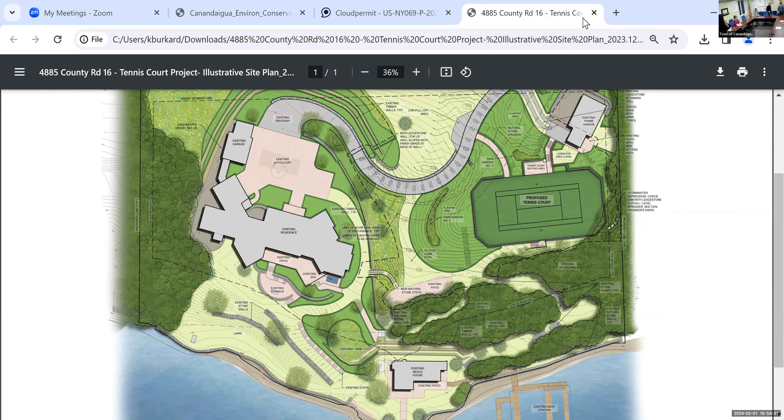That was really nice looking. Let's see, have another guest here. We should make those renderings our standard from now on. The site plans were harder to look at.

This is our 5 and 20. Are you for the 5 and 20 as well? It's going to be okay. I was just trying to figure out who was here. So we'll skip around and do the ones that people are here for first.

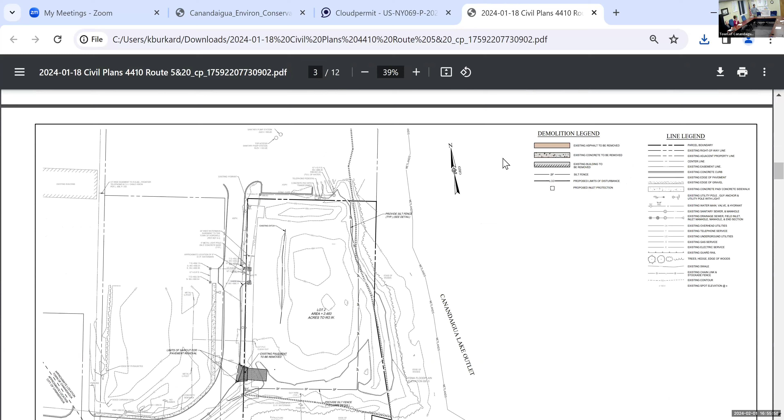So it's essentially a pre-approved pad site on 5 and 20. It was part of this whole overall development with the hotel. I believe it was approved, I have the approval drawings from '07, '08. And essentially we've kept the same design. It kind of fits in there with the outlet and the setbacks off of 5 and 20. The building is 100 square feet smaller than what was approved. It's going to be a 2-tenant medical use.

The parking, let me go back. The original SWPPP was developed for the whole 3 parcels with the retention pond in the rear. We looked up that stormwater permit. It actually, the hotel closed the permit in 2020. But we would submit a new SWPPP. We have prepared one. So what's happening is everything is draining to the bioretention rain garden areas. There's no curb, so it just sheet flows into there. And then there is a discharge here and it will continue to the stormwater management facility.

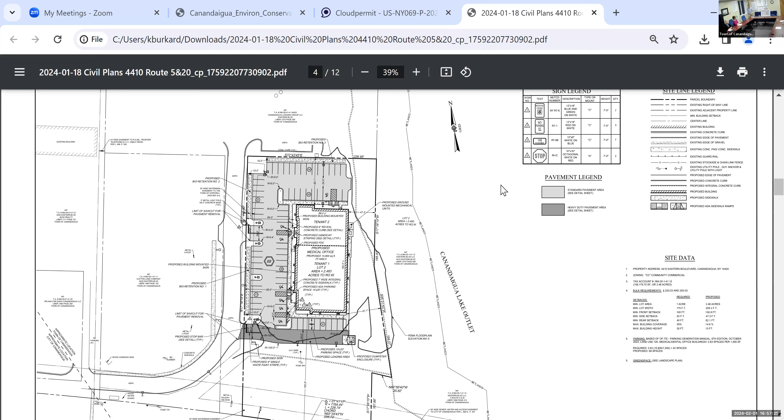Landscape, we're adding landscape. Most of the material we've provided is native. We put the dumpster enclosure kind of in the front. It's going to be screened. I think we're about 754 feet off of 5 and 20 with some vegetation in between, so I don't think there will be an issue with it. There were some renderings from the architect, it's more of a modern style.

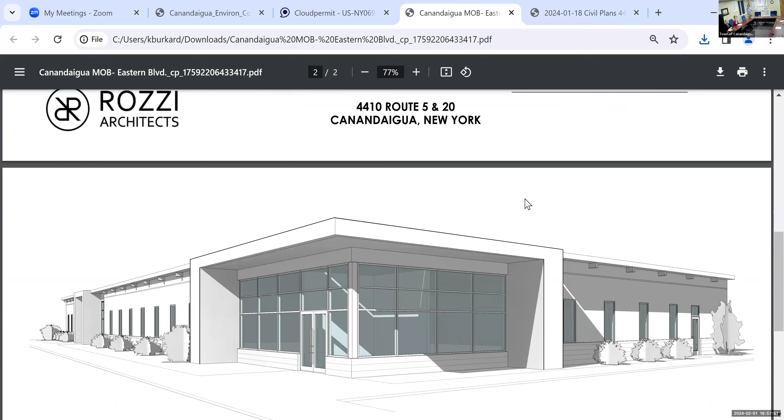Do you have something you wanted me to open? Let's see. Exterior perspective drawings, yeah, we do the perspective drawings. That gives you the look. Yeah, that's very nice. If you go back, it gives you the kind of color palette, which was more neutral, earth tone colors.

There are some state wetlands. We had them delineated, earth dimensions delineated them. Up in the front, there's essentially a drainage ditch through here, and then off of the outlet. That has not changed per the previous determination. So we have the 100-foot buffer both ways and we are out of that area. So no changes in the wetland delineation when we went back out there. There was a little more increase on this one, but this one remained the same.

Okay, so outside, within the drawings, we have all the wetland 100-foot buffers. I didn't get a chance to check, but any earthwork or whatever, that'll be not anywhere in that area would occur, will not touch, will not disturb the buffer. There's a floodplain.

Floodplain comes up in a weird shape. We are impacting the floodplain by about 50 cubic yards, and we have offset that in this area with a cut of about 66 as part of our cut-fill analysis on the floodplain. So we provided that mitigation.

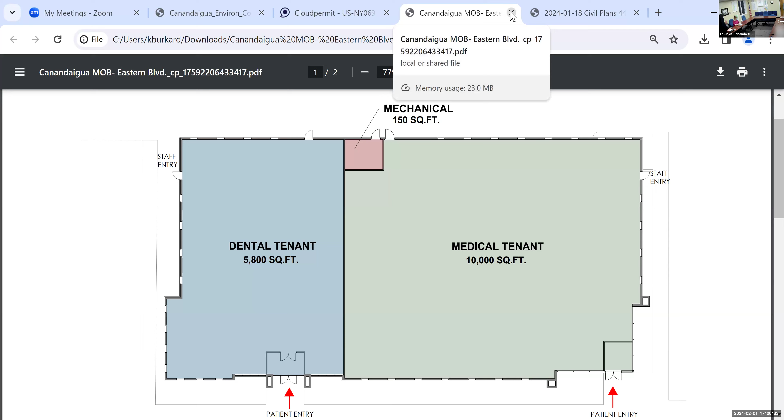And we're all here, isn't that awesome? It is.

We had passed on this one, just so you know. This one's going for an extension, and it's also going to the zoning board for a variance interpretation.

And we did this one, they had come in, it was the Wegmans tennis court, so we had done that one already. We're up to New Michigan. This was a subdivision. Mike, did you have any info on this one?

I think Kristen worked on that one, that's not Dave Emery, is it? No. It's right on the corner of New Michigan and County Road 30. Just two big lots.

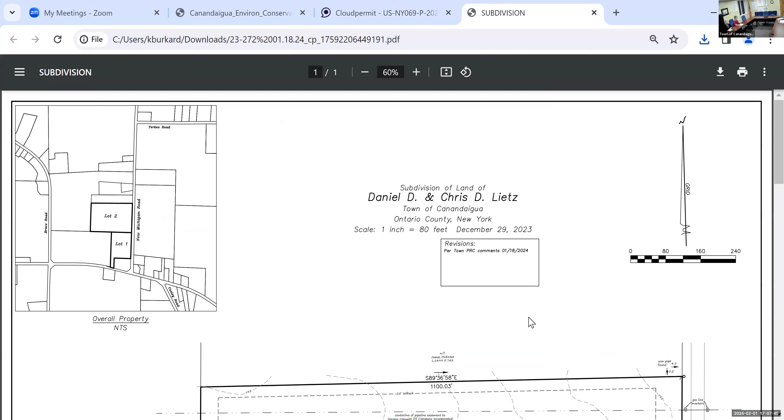Why are we seeing that? It was farmland, so I think it's getting— we just automatically see it when it's farmland? I believe so. Acre woodland right next to it too.

Edith's next to it, yes. Very familiar territory. They're just dividing it into 2 lots.

I will put on the ag committee hat and say it's a loss of farmland. Well, it is a loss of farmland. If you're interested in 3 square meals a day, you hate to see too much farmland go, but yeah, there you go.

This one is just north of the new one that we saw before. No, not the strategic farmland, but the new agricultural overlay PDA. That one, its northern bound is County Road 30, so this is north of that.

I think if it's just like a house—because we know from the one that was on the other side of Edith, that the aquifer is not very wonderful. It's pretty shallow, it doesn't recharge very quickly, and I don't believe they have public water at all. No, there is no public water from Yerkes north to County Road 30 to North Bloomfield Road.

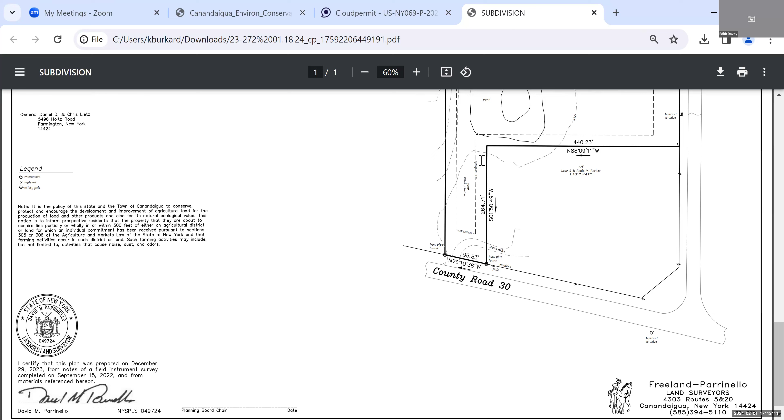I noticed they got a little jig jog that comes out to County Road 30. Well, maybe they would access water through that, if they accept that it's going to have to go bypass the pond if they are putting the house next to New Michigan. Hard to say, but wait and see. Not much more I can say.

Anyone else? Nope, we'll move on. Next.

Lakeview Lane. Mike, do you know about this one? Yes, tear down and rebuild. He is staying on the exact footprint. It's just an old house. He just wanted to, and the owner is actually the architect on this, so he did his own plans, impeccable plan.

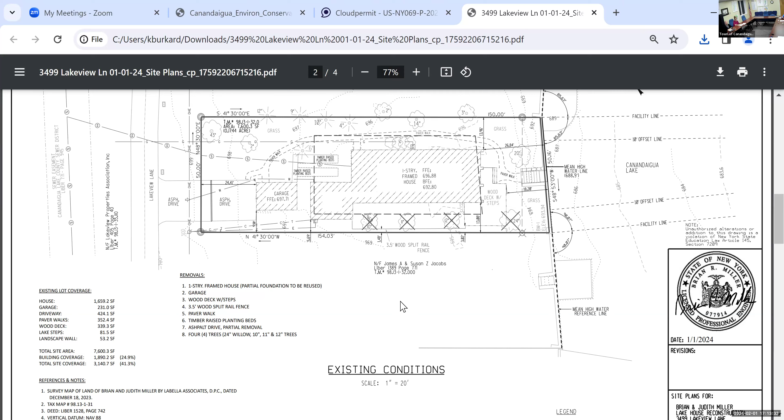I noticed that they were knocking out some trees. They're taking out 4 trees. I don't know if it says what kinds they are. Willows. Willows do drink a lot of water. And the neighbor asked him to take them too. He's like, please make sure you take those trees. The one is pretty big, yeah, it's 24 inches.

There was a nice graphic of the lake, that's in the miscellaneous category. I don't know if it's that one, but that really helps you place it. So they still have this noted, but I think they were taking that out per their plan. The maple tree stays, see, they're taking that one out. So I think they need to update their drawing because they still have that willow in there.

Down here, I think they're gonna wanna be careful doing their construction, because it is pretty tight and they're going to have to avoid root zones for the trees.

And if they can plant some other trees on their property, I would really suggest leaving this first willow, the one that's on the lakeside, that's shown in their graphic. Yes, it would certainly soften the view from the lake. It'd be good.

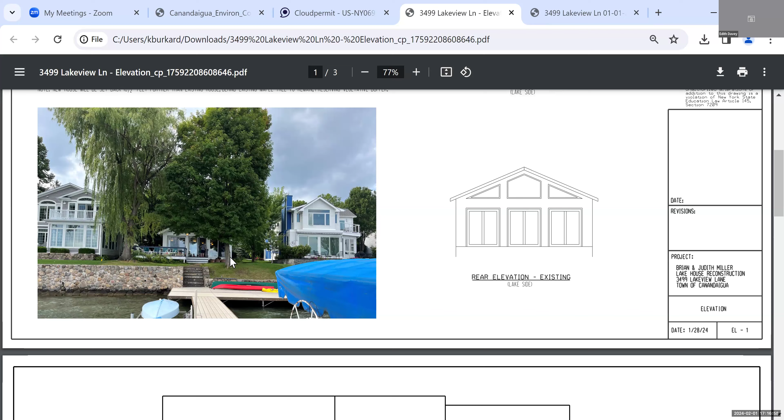Anyone else? No, Joseph? No, Gary? Nothing else here. Well, I guess that's about it for that one. They do have some nice coverage from the lake there, so they're really gonna wanna watch that maple tree in there. Yes.

And then the last one was Island View Drive. You know about this one, Mike? Yes, so this one was tricky. Half of his, well, a quarter of his lot is on city property. The boundary goes diagonal through it. So we had to work on that with Chris Nadler. The conclusion was that the whole lot is to be taken into consideration, so anything over the city line, we don't have to deal with.

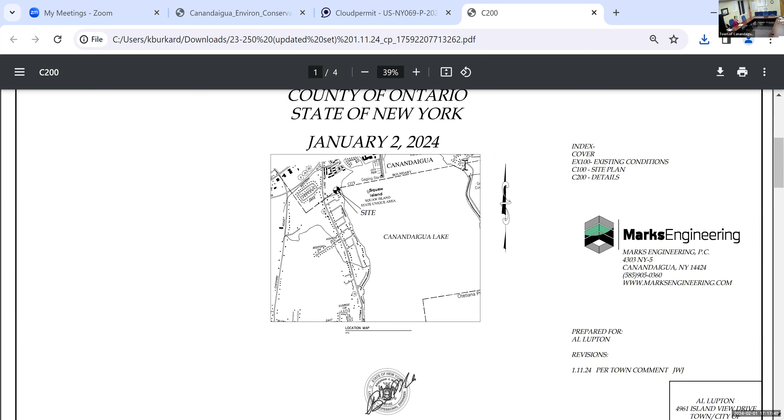So setbacks for the pool to the city boundary, the city has to worry about, even though it goes over our town boundary. And I was like, so he gets a zero setback, unless a variance, he goes, nope. Alright, so we went back and forth with this for a long time. But he does need a lot coverage variance because he is going over 8.2%.

This is a small lot, right? Yes, and you can see the city property line going right through it. There's too much stuff covering that. With their coverage, but they took it all into consideration and sent us, do what you want. They're like, okay, we don't care. How much is he over on his coverage? 8.2%. You can probably take out a walkway and make it work.

Can you scroll down for the actual pool and everything around it? Just a minute. There we go, there it is. That would be my suggestion on these small lots, to take out a walkway or just reduce the footprint of the patio.

Unless it has to do with ADA compliance or anything. Well, there's a hot tub pad there now, they're connecting the concrete to it, where they could have easily just moved it down to that pad and did the pool a little differently. Instead of having it on there, it would save a lot, it would have been off the setback lines, it would have been under coverage, instead of crossing over the city line. The zoning board might suggest that anyway.

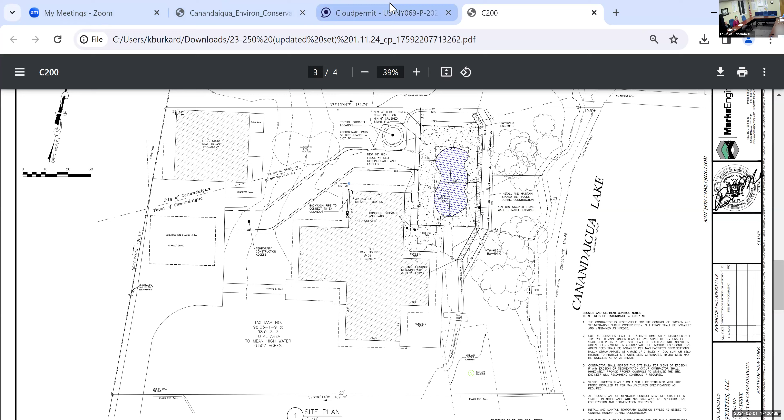Definitely add some shrubbery on the lakeside. I don't know if they've got a yard for that, or maybe they're taking it out - I don't believe they are. If you look at the encore of it, you can see his main issue for putting this in is the area he's in at the lake is shallow, weedy, filthy, people can't swim in it, and he rents that, so we have to have a pool.

That's where all the seagulls visit too, I'm sure, in the water. This is a short-term rental. Yes, so is the garage that's on the city line, it has an apartment upstairs, and he has a house right next door.

And it goes right through, that line goes right through his living room. So we don't need to worry about compliance with our short-term rental stuff within the city - we're working on that, and he's not happy about it. Because we said we will give you a permit for the rooms on our side, not on the city side, and he's blowing a gasket.

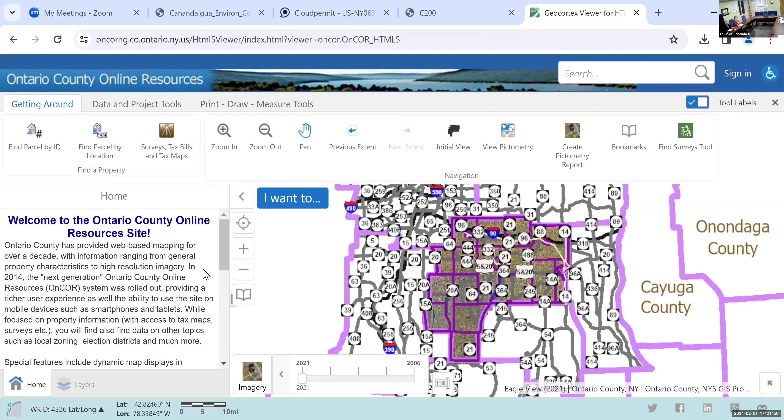Yeah, if it's just for rentals, I think it's an easy fix for him, if he's okay with just reducing that footprint.

Island View, right? Yes. Too many similar names.

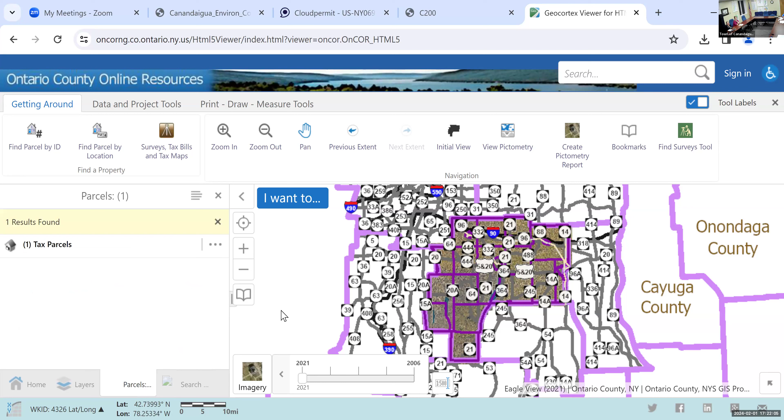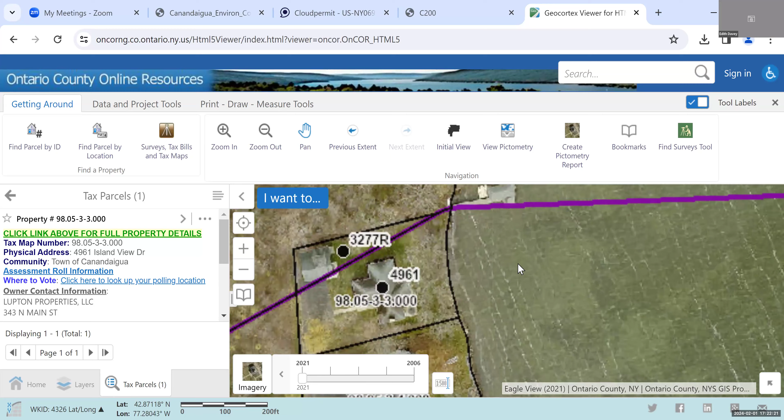Oh, the lake was choppy that day. Little foam on it, looks like.

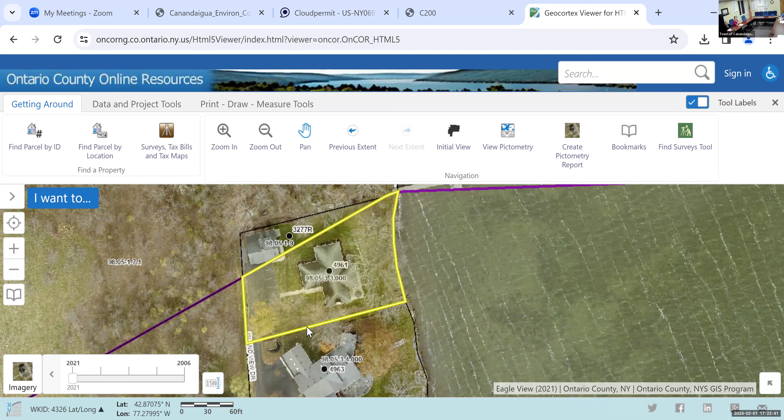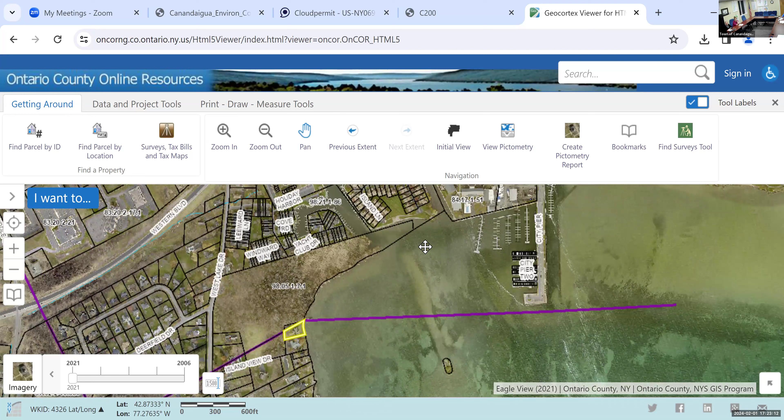Is that right by the park there, basically, or how far off is that? Am I completely out? There we go. More. The harbor. Yeah, and I don't know, there's water right there.

I would suggest some shrubbery on the lakeside to help soften that view, however we can. And definitely try and reduce the impervious surface, it's not that much - changing that patio around the pool should do it, just a little bit. That is a weird little touch. And this one's in two under here, it's right through.

Any other comments? Gary or Edith, anything else? No, not here. They should be held to the lot coverage standard, if at all possible.

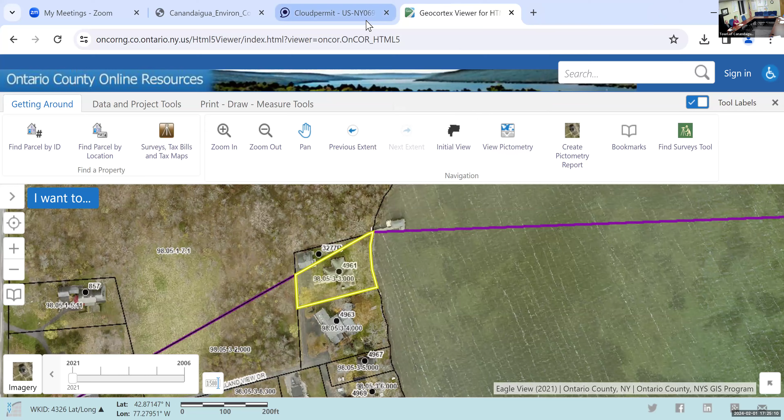Well, they won't like our comments either. No, he's struggling with short-term rental things right now. So I think that was the last one.

Yes, so we are up to the newsletter. Thank you, Edith and Patty, for the articles. The newsletter will go out Monday. And February 23rd is the deadline for the March newsletter, so if anybody would like to submit anything. I'm not gonna be submitting for that one, but one of you gentlemen could come up with something.

I'll volunteer for something for the March newsletter. Okay, thank you, Gary. Just send me your article and photos whenever you got them. I'll put that in. Thank you so much.